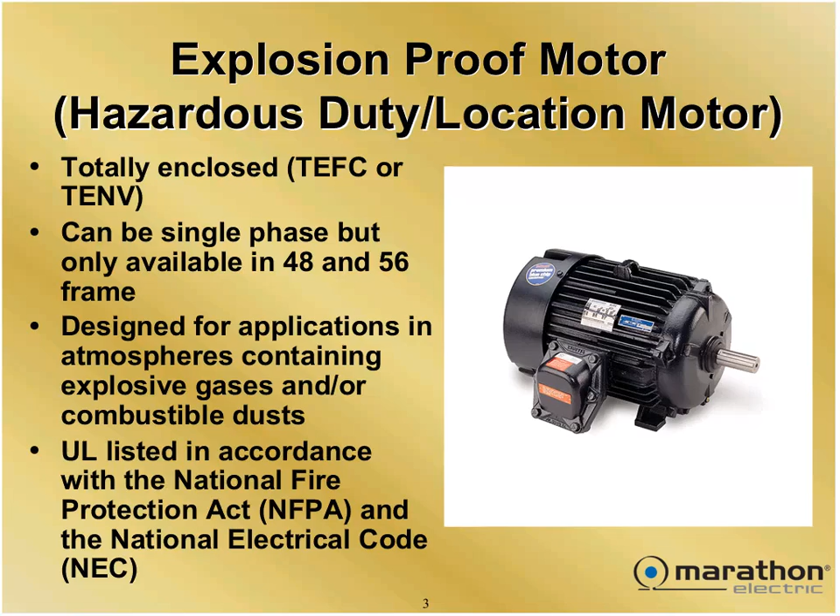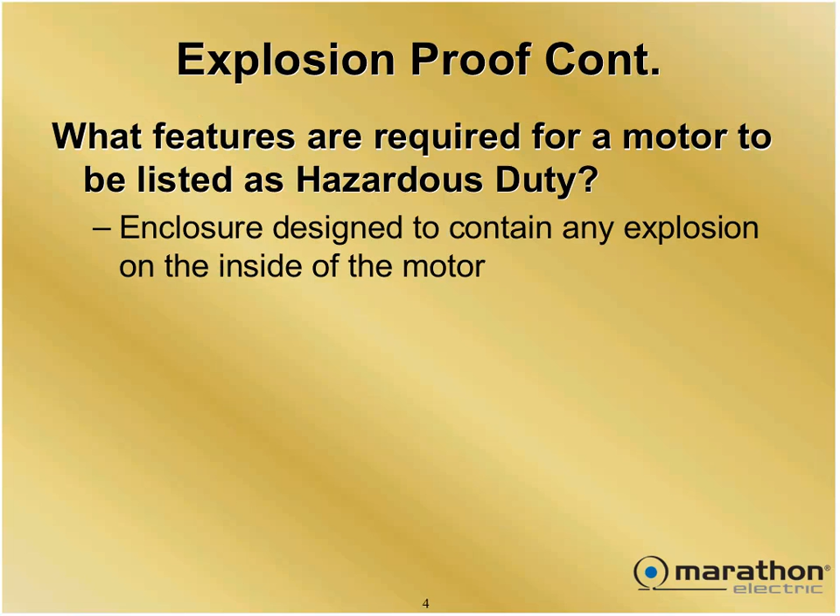They're designed for applications in atmospheres that contain hazardous material, explosive gases, combustible dusts, and some other things you'll see in a minute. They're UL listed in accordance with the National Fire Protection Association and the National Electrical Code. Very, very stringent manufacturing techniques are used to build these explosion-proof motors. You just can't slap something together. Very precise machining. The enclosure is designed to be so tight, it's not airtight, but if an explosion were to occur inside the motor, it has to be contained inside the motor. You don't want it blowing up the building. Okay, so what happens in Vegas stays in Vegas in an explosion-proof motor.

All external devices, all rotating devices, have to be designed so they could never cause a spark, because that spark may ignite the atmosphere. The other part of the requirement is that the motor is designed so that the external skin temperature, the outside of the motor, in any condition, has to be lower than the temperature code that you have it listed for. The temperature code is that temperature in which the hazardous material becomes unstable. So, even though it doesn't cause a spark, you can have enough heat just from the case of the motor to ignite the stuff, and that's bad.

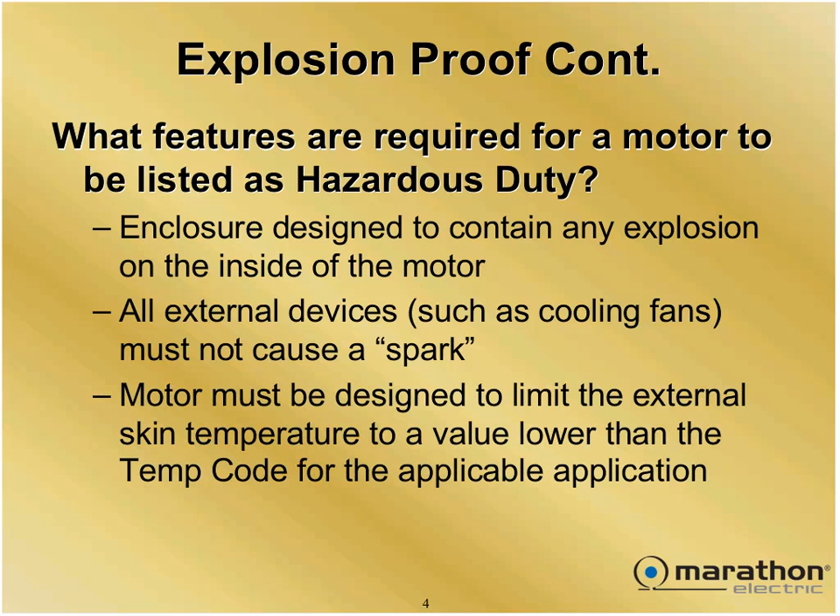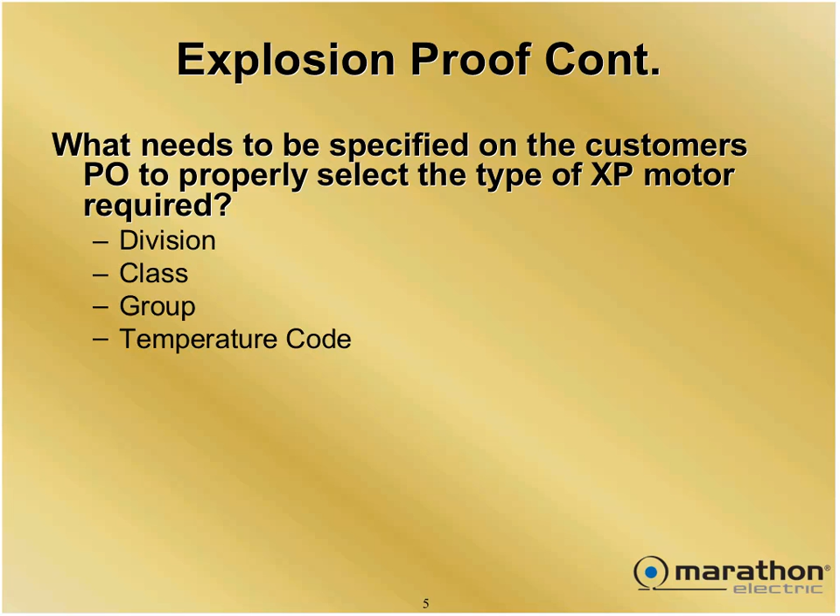So, what needs to be specified on a customer's purchase order to properly select the type of explosion-proof motor for the requirement? We make a lot of different types, and there are four important things you have to have to specify the right motor. One is the division. Second is the class. Thirdly, the group. And finally, the temperature code. If a customer is specifying an explosion-proof or a mod to an explosion-proof, and they don't give you those four items, don't guess. Go back and ask. Those are the four things you need.

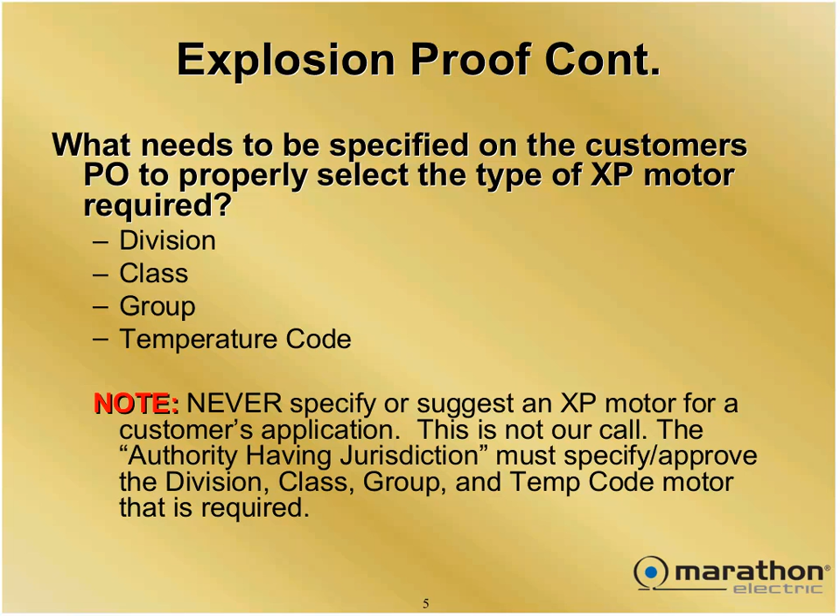Why? Because the authority having jurisdiction over the application is the person responsible to commission the motor for use. If you send them the wrong motor and the authority will not commission it, now you've wasted everybody's time plus money. If it's a build-up, you've got to rebuild it, bring it back, whatever. You might have just built a pile of junk because nobody wants it. But with those four things defined, we have 99% chance that it'll work. So what do these four things mean?

There are really two divisions, just two. Division 1 is a location where the hazardous material is present in the environment all the time during operating conditions. Division 1 is truly an explosion-proof motor. Division 1 always, which should be in bold letters, requires an explosion-proof construction.

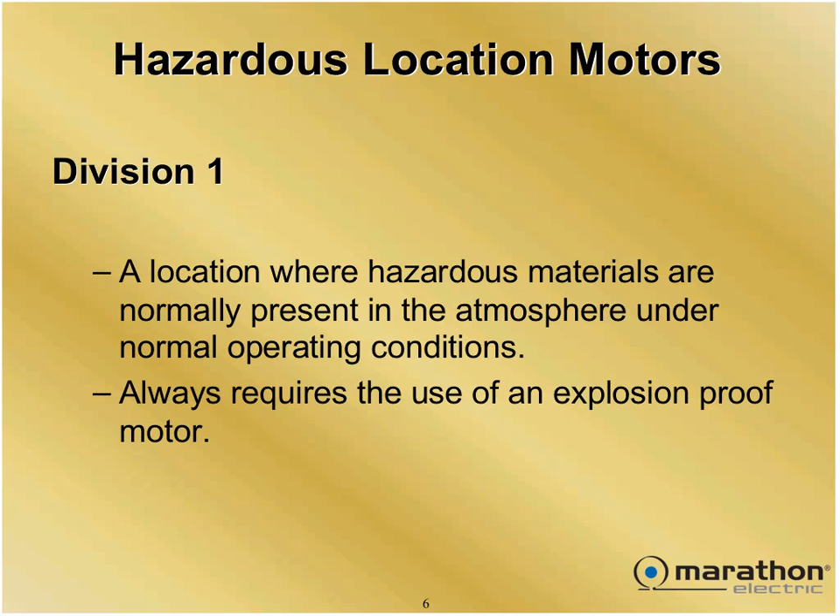Then there's such a thing as a Division 2. A Division 2 is a location where the volatile atmosphere may become hazardous as a result of an abnormal condition. That would be a situation where the motor may be in an office building, but the office building is in a grain refinery, or in a gasoline refinery. And if there were a leak or some catastrophic problem happened, it might get that volatile to this motor. So normally it wouldn't happen. So that's called Division 2.

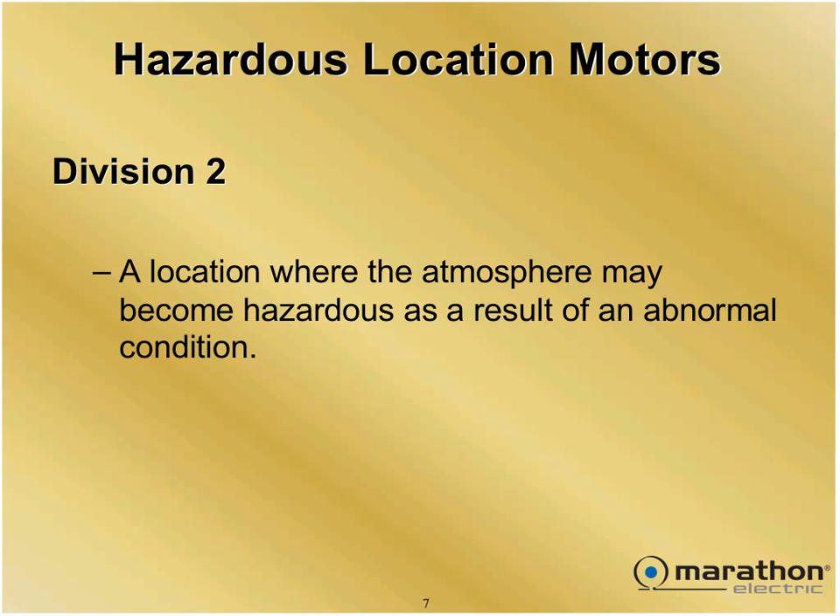Not quite as stringent. You do not always need an explosion-proof motor for Division 2. But, because the NEC allows that, still, the authority having jurisdiction makes that call. We don't make that call. The customer can make the call through his safety engineers, but we don't make the call. So, if they say it's a Division 2, you say, oh, well, that could be anything. I can give them any kind of motor.

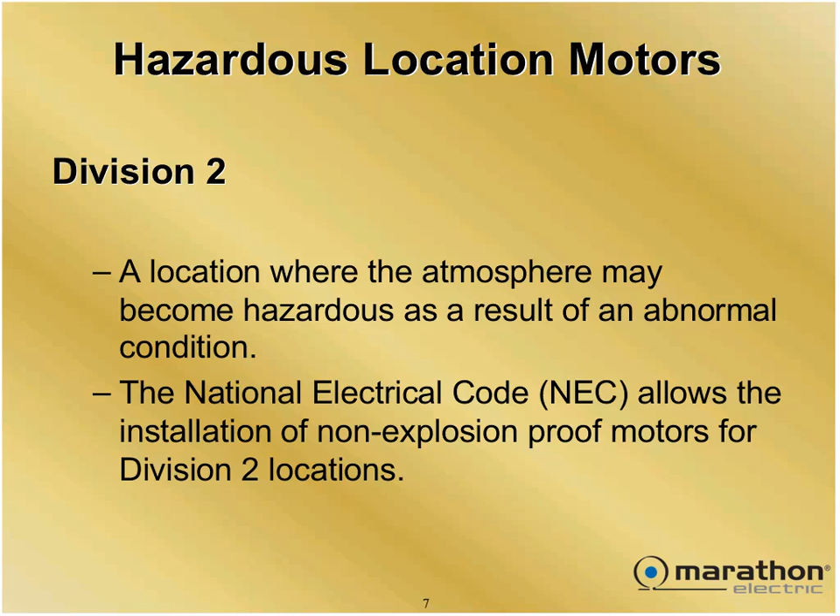No, you can't. Even though it's Division 2, and it's not truly explosion-proof, you still have to build it so anything like a metal fan or anything that spins cannot produce a spark. Safety reason. If we use a plastic fan, which we often do, the plastic fan and the guard that covers the fan must be non-static material. Explosion-proof fans and fan guards are non-static. So if you just had a plain TEFC motor, you could put the explosion-proof parts on it and it would qualify.

Non-static means the parts, when they're molded, have carbon black in them. Carbon black is conductive. It's a conductive material. So that the fan, as it turns, would not build up any static electricity. Because it's conductive, all the static electricity would be bled off to ground. So think about your house in the wintertime when it gets really dry and you scoot across the floor to flip a light switch and there's static electricity, what happens? You get a spark. You can't have sparks. Sparks make boom. You don't want boom. Can't have sparks. So, non-static.

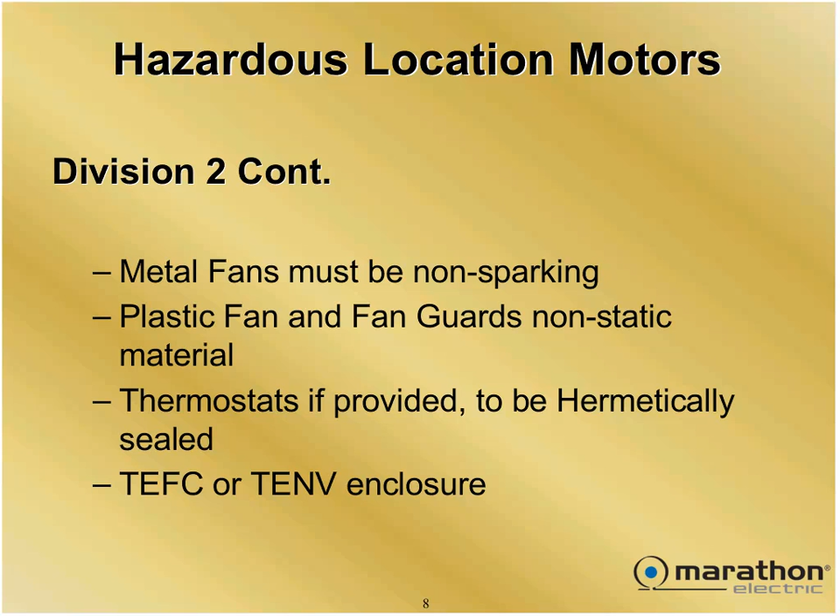Thermostats: if the temperature code requires thermostats, and we have a Division 2, we can use thermostats, but we have to use hermetically sealed thermostats. It's a special type that's made. Reason? If the thermostat were to trip, it sparks. So, hermetically sealed thermostats, the case of them will not allow the spark to get out. That's why it's called hermetically sealed. So we can use those, but they still are normally fan-cooled or non-vent enclosures. Too difficult to make a drip-proof into a Division 2, most of the time.

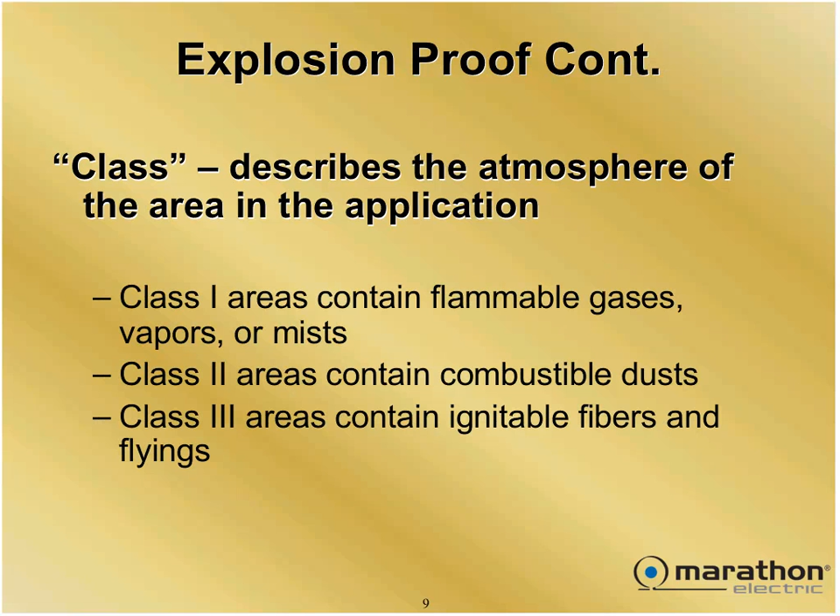Okay, so that's division. Now we have class. Class describes the atmosphere in the area of the application. A Class 1 explosion-proof motor is one that's built for flammable gases, vapors, or mists. Class 2 are areas that contain combustible dusts. And Class 3 are areas that contain ignitable fibers, such as magnesium fibers or materials from textile industries. And guess what? We do not manufacture Class 3 motors. So if you ever get a request for a Class 3, no quote. We do not make Class 3.

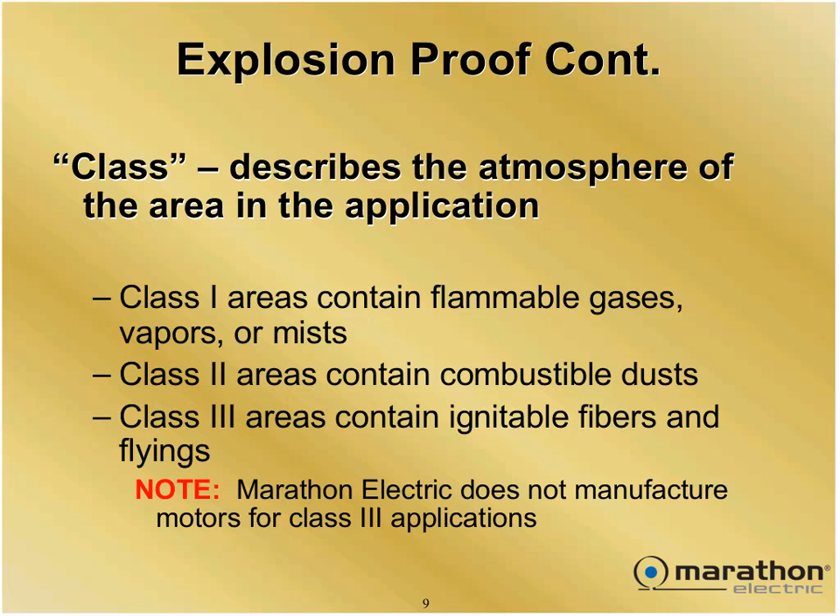Now you would think, well, Class 1 is harder than Class 2 because Class 1 would be gasoline fumes, and Class 2 would just be dust. Well, it so happens that grain dust is used to make dynamite, and plastic dust is used to make C4 explosives. And it is much more volatile than gasoline fumes. So Class 2 is really harder, even though you might think it would be easier.

Then after we have division and class, we have to have a group. Group is the type of gas or dust in the application. And those are usually letters. Group A, B, C, D, E, F, whatever. Note, Marathon Electric does not manufacture motors for Group A or B. B is hydrogen, highly explosive. If you have a request for a B, I think we manufactured one motor in my whole career that qualifies for B. So, you will look in the catalog, you will not find motors for Group A and B. And only 48 and 56 frame, for the majority, are acceptable for Group E, which is metal dusts. Typically then, the ones we have are C and D, and F and G. So we skip the others.

And finally, the temperature code. The temperature code describes the maximum allowable skin temperature that the motor can get to that we talked about just previously. Those codes start with T and have letters and numbers, and all of those have a different maximum temperature value. In an explosion-proof environment, in order to meet the temperature code, the motor must go offline prior to reaching the temperature that you coded it for.

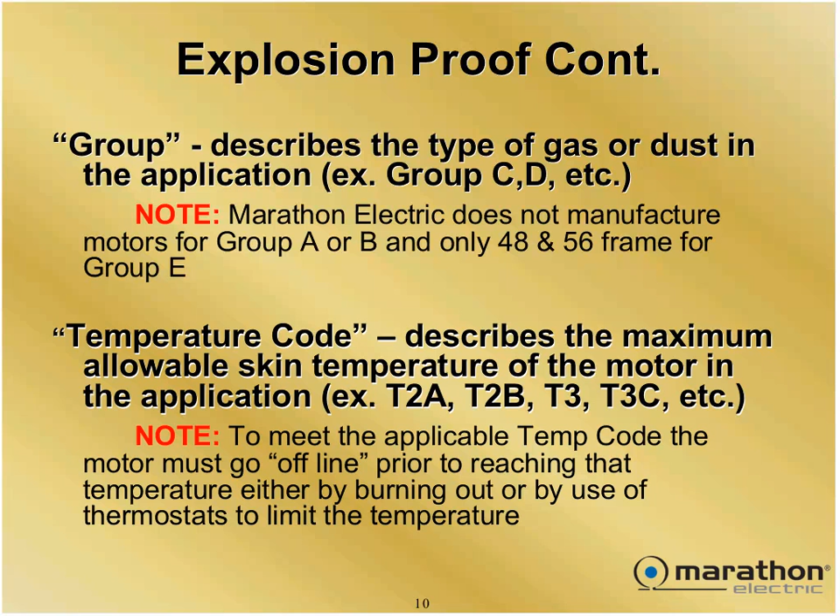That either means it has to burn up and still not get hot enough, or we have to have thermostats, the thermal protection in the motor, to limit its temperature if it does start to get hot. Okay? That's explosion proof. Four things to remember: division, class, group, temperature code.

Another type of definite purpose motor we make and sell a lot of are called fire pumps. This is the only other UL listed motor we have that I know of. Most motors are UL recognized. These two motors we talked about are UL listed because of the National Fire Protection Association and the NEC.

The fire pump motors are standard. The standard fire pump motor is drip-proof, rigid base. They're 3-phase. They're used for fire pump duty. I've never seen a single-phase fire pump ever. And they're basically used for the sprinkler system you see in this room. So the sprinkler system goes on, and hopefully it'll douse the fire before the building burns up.

Typically, they're painted fire engine red. Not all of them, but the majority of fire pump motors are painted red. So when the fire marshal comes in to inspect your building, he sees that red motor. It's not just a regular pump motor, it's a fire pump motor. That's what he's looking for.

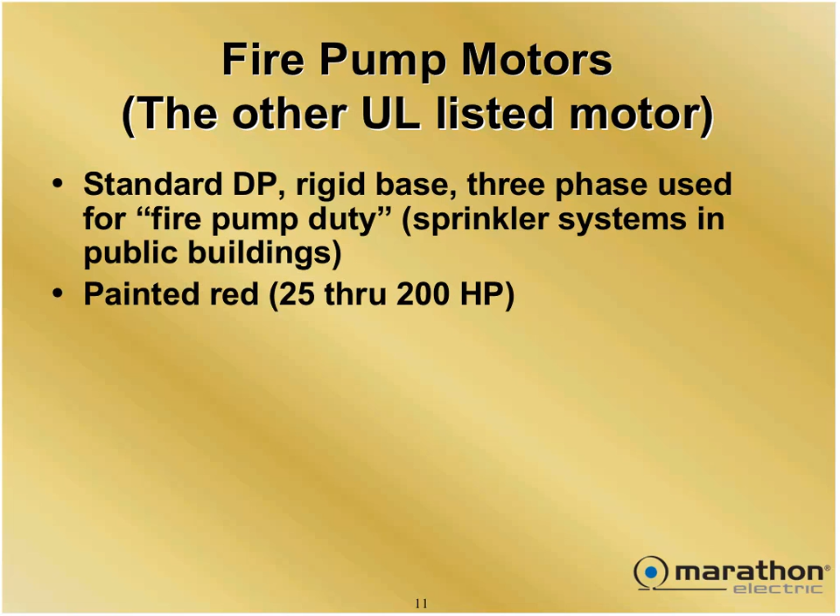They are soft starts, code G or less, plain vanilla torques. They have 12 leads, typically, suitable for part winding start and for wye delta starting. The reason for that is they assume that if we have a catastrophe like a fire, we may have some very bad power shortage in the building. So we don't want to hard start this motor and have it trip its breaker, and we don't get water, and we got a burned up building. So they usually make them for soft start, and they're easy starting pumps. But they do have 12 leads. So they are UL listed.

They are exempt from the premium efficiency levels of EISA. So they're EPAct efficient. The reason for that is they are so seldom used. They're only used when the fire marshal checks the system or if you have a fire. When the fire marshal comes to check the system, the motor only runs 5 or 10 minutes to make sure that it's working. And they usually only come to a building once a year or every 6 months.

And the second reason: when they are being used, you have a fire. The last thing you're going to worry about is whether you got a premium efficiency motor or not when your building's burning down. So they allow them to be EPAct. They don't use a lot of energy unless they're needed.

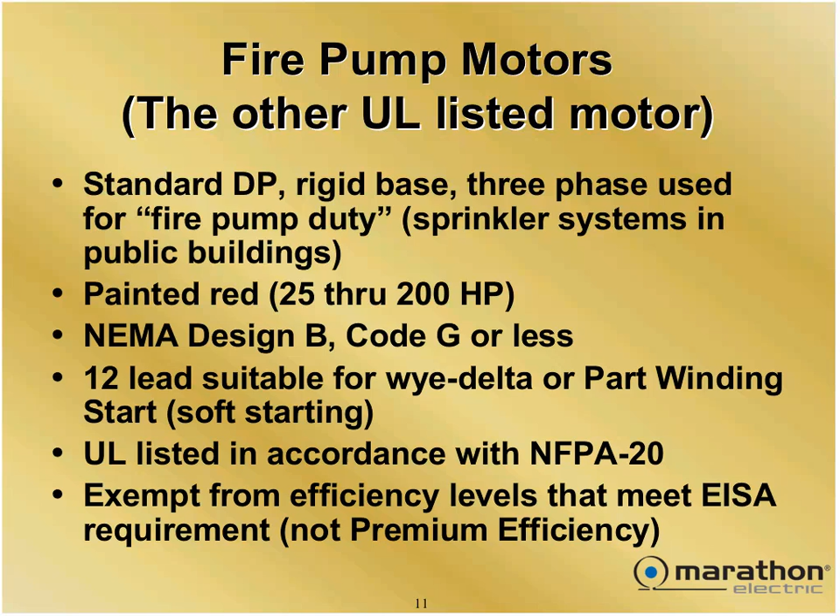Another group of definite purpose motors we sell a lot of, and Marathon is one of the largest servicers of this industry in the world. They're called farm duty or agriculture motors. The four most popular types are what we call high torque, extra high torque, whose nickname is chore motor, because it does chores on the farm, I suppose. That's why it's called that. An auger drive motor and a crop dryer motor. We'll talk about each one of these.

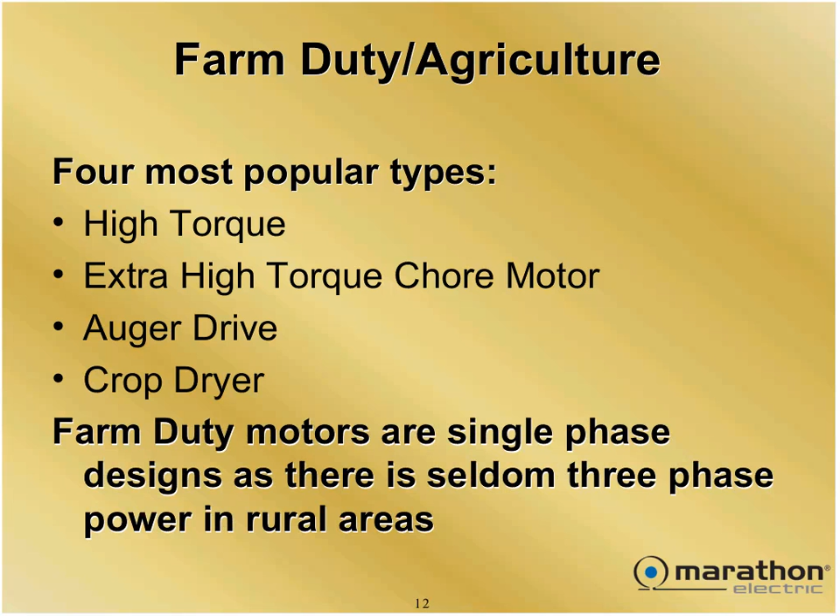Farm duty motors are primarily single phase. Why? Farms don't have three phase. Farms have single phase power. If we had to put three phase power on every farm in this country, we'd go broke. It's very expensive. So they're single phase. They're used in rural areas. Some are three phase, very, very few. The high torque and extra high torque have similar features. They are fan cooled so they have better reliability to be used outdoors.

More reliability than a drip proof. Even though if they're not used outdoors, it's okay, but we make them fan cooled. So we expect them to be in some kind of an outdoor or dusty or dirty environment on a farm. And the fan cooled also makes them better for rodent protection.

Because if you're on a farm, you're going to have mice and snakes and things that, when it's cool out, like to crawl into your nice warm motor. Well, if it's drip proof, they'll get in. If it's fan cooled, odds are they won't get in. So they're rodent protected. The high torque motors are capacitor start or capacitor run motors that are general purpose torques.

That's a high torque motor from our previous discussion about various single phase types. But the chore motors have extra high torque, 300% plus. And they're used for tough applications such as silo unloaders and barn cleaners and bunk feeders.

Now on a farm, especially in this part of the world, if it's 10 below zero and the farmer wants to start up his elevator to put some hay in the barn or something, the gearboxes are all cold, the grease is real thick, it might have ice on it. You need this big high starting torque motor to break things loose. So that's why they're like that. That's why they're called chore motors.

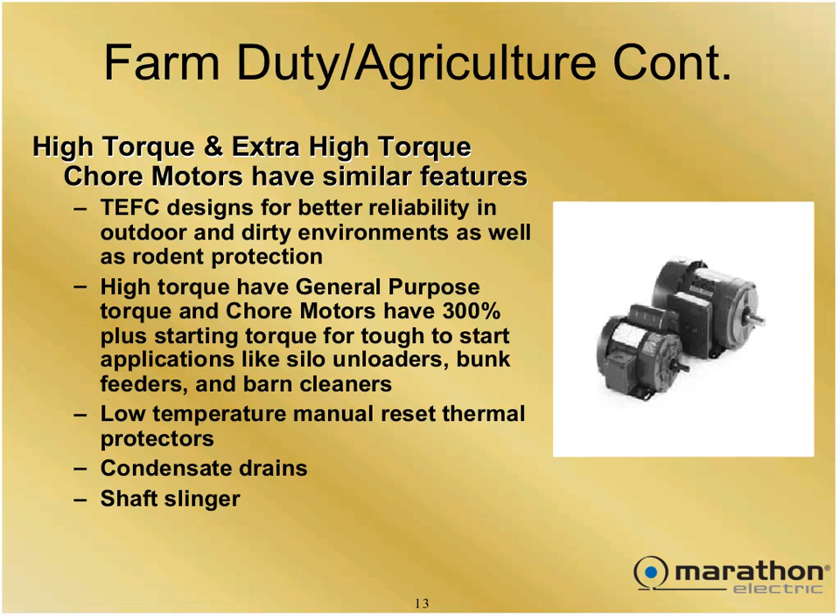So we put condensate drain holes in these things, real small holes to let the condensate have a chance to drip out. We put a shaft slinger over the shaft so that dust doesn't get towards our bearing, and that's what those motors look like. Another very common definite purpose motor on a farm is called an auger drive.

Auger drives are single phase, of course, because we're on a farm. They're used primarily for automatic feeding of animals, but there are hundreds of other uses for them. Sometimes they're used for automatic product recovery systems, such as collection of seeds or eggs from a chicken delivered to a central place where they can be washed and processed and packaged without a human being having to go gather them all.

The automatic feeder is pretty obvious. You have 30 animals in a row in a barn, and you have to go feed them all, so you dump all the feed into one place, turn on the auger, and it delivers it down to the animals. That's what they call it. There are some issues with this motor, by the way, that we have to take care of.

We always have issues. They are almost always NEMA N flange mounts, because that's the way the auger gearbox connection is made, so that they will fit. So they're NEMA N flange mounts. They have automatic or manual overload protectors also. You certainly don't want somebody getting their hands in an auger.

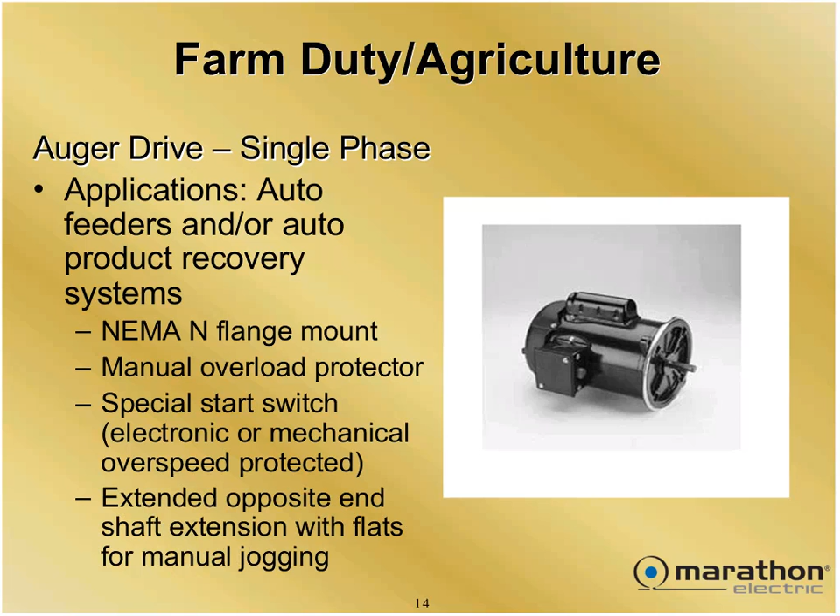Another type of farm duty motor is a crop dryer motor. These are special designs also. They are almost always drip proof, and they are used in grain drying systems. You've probably seen them on the farm. You may have a big bin of grain, and at the bottom there is this wind tunnel with a motor mounted in it and a huge fan. And this motor is going to drive this fan and draw air through the grain to dry it out. It could be tobacco, could be corn, could be any kind of things.

And they're primarily single phase, but sometimes these are three phase and we stock them both. The reason these are more prevalently three phase than the others is a lot of these grain drying systems are by a grain mill or a refinery, and they may have three phase power. On the farm you probably don't, but at the grain mill you might. So we stock them both.

They're ODP air over designs. In other words, the fan that the customer has that's drawing this air through the tunnel draws air over the motor for cooling. The motor is located inside this wind tunnel. It's just like an open-ended barrel on both ends. Okay? They have long leads. Because they're mounted inside, we provide long leads to get the leads to the outside so the farmer can connect it outside and doesn't have to crawl inside to connect it.

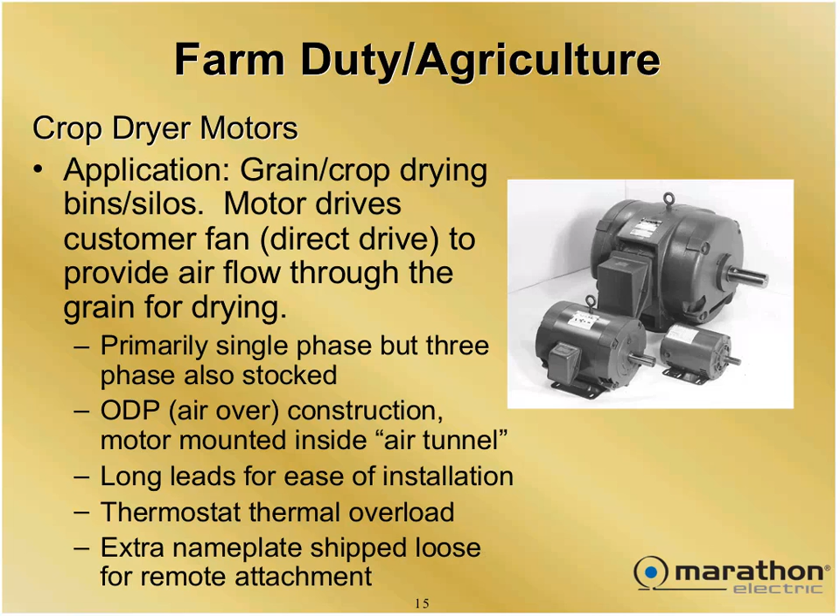Another type of specialty motor that's fairly new for us are washdown motors, specifically designed to actually physically hose off the motor with water or caustic soap, even steam sometimes. They're used in food processing where there's cleanliness issues, so you have to wash stuff down. So we have washdown motors now. You've heard me say time and time again, water and electricity don't mix. These motors are specifically designed such that they're sealed up and they're virtually waterproof. I'm not saying you could dunk them in a bucket of water, but you at least can wash them off.

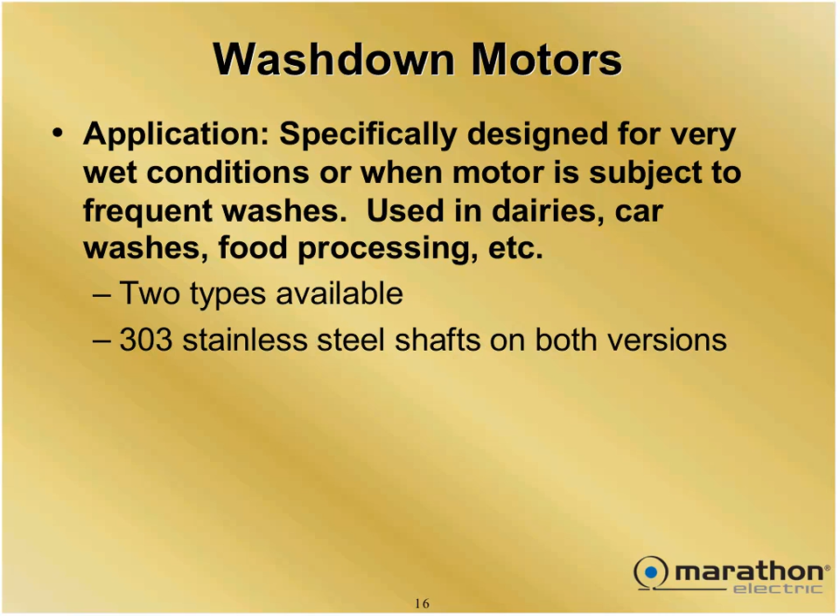We make two different types. Both types have 303 stainless steel shafts. The shaft extension on these motors is stainless steel because the 303 stainless resists rust. It's going to get washed down, and you don't want it to get rusty.

They have corrosion-resistant coatings on their internal parts as well as the external, such that now these motors are gonna sweat from the condensate. They're gonna get wet inside. They have drain holes, but that doesn't mean that it's all gonna come out. Sometimes they get clogged. So we have to put corrosion protection material all on the inside of these motors. We also use gaskets and seals on the external part for the very same reason.

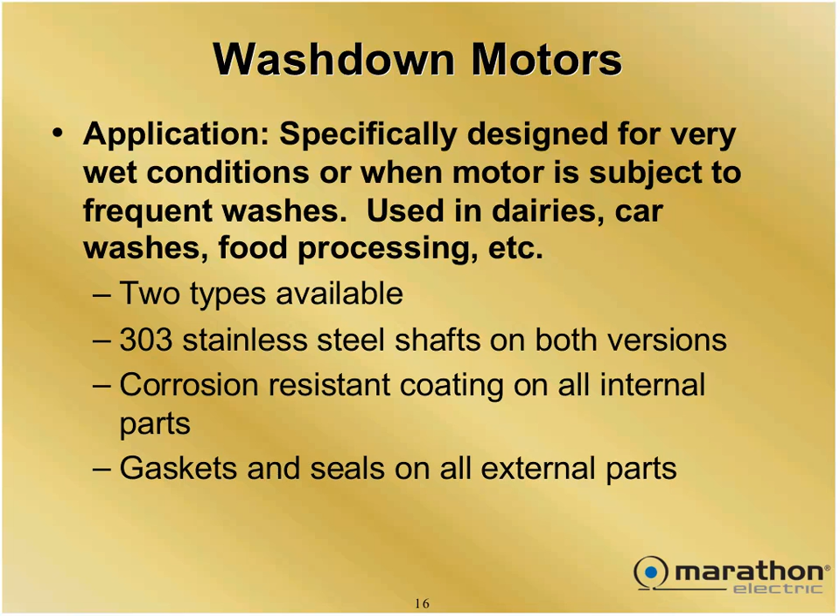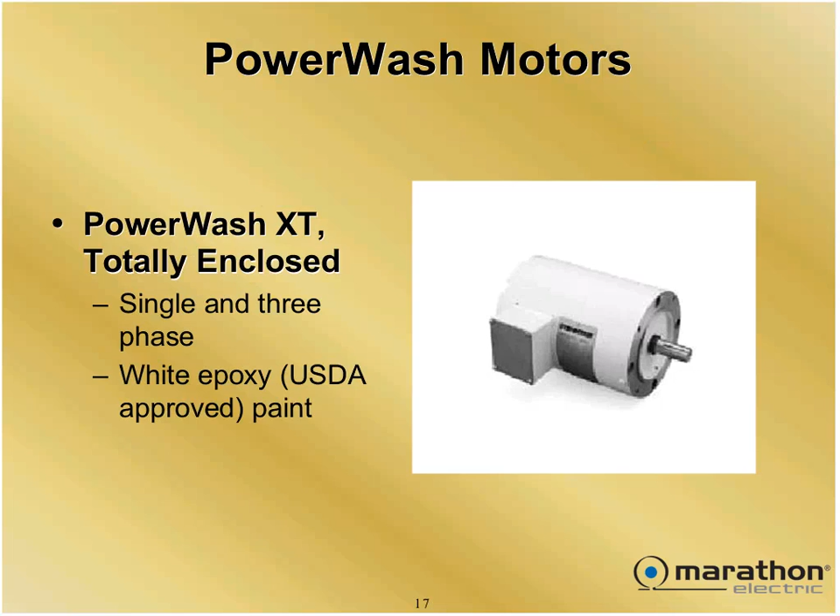Keep the water out. The conduit box has seals on it, and the shaft does not have just a slinger, because water can get behind the slinger. It actually has a seal. One type is called PowerWash XT. Totally enclosed. We build them both single and 3-phase. They have white epoxy paint, which is USDA approved, on the outside of them, and all the corrosion protection on the inside. They are not used for the super demanding applications of washdown.

This one is Power Wash SXT, which is totally enclosed. These are primarily only 3-phase, but they are inverter duty rated since they're 3-phase. And they have all stainless steel construction. So they're a brute. I mean, you can wash these things down with lye, caustic materials, or whatever needs to be used. They're often used when we have an application where they're processing meat, cutting chickens apart, or whatever,

where there's serious E. coli issues, germs. We have to make sure we have cleanliness. They use this type of motor quite a bit. The other type of motor might be used in something like a bakery or maybe a brewery where it's grain, but you don't have as much issues with contamination. Is this 303 stainless?

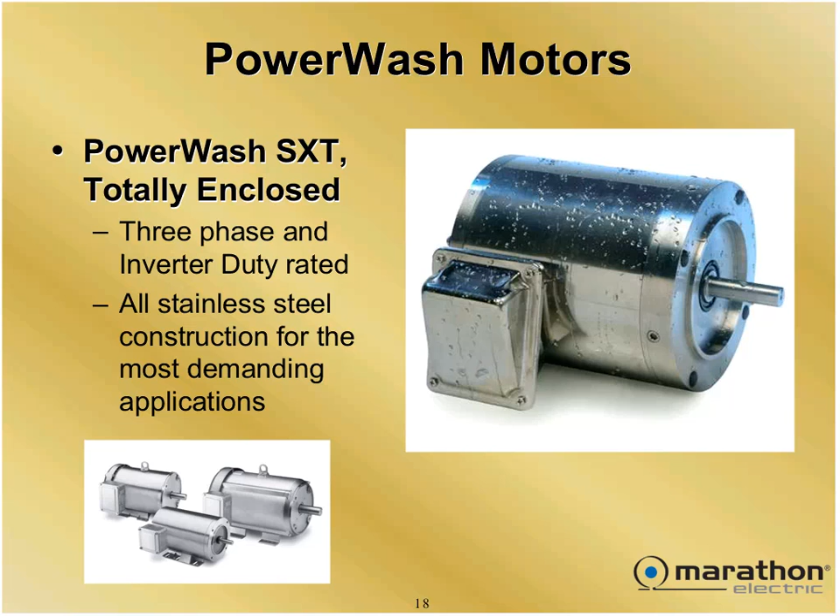303 stainless. It is a 300 series. I'm not positive, it's a good question. 300 series means it has rust preventative, so it may not be exactly 303, but it's a 300 series, could be 316, 320, not sure. It's a good question. Okay, back to our questions again.

Okay, who's my victim today? Kristen's my victim. Okay, Kristen. Motor designed to successfully operate in a hazardous duty location is called what? What kind of motor? Explosion proof. Good job. Anytime you see explosion proof, you think hazardous. They're used almost interchangeably, those two words. Explosion proof and hazardous. Pick a victim.

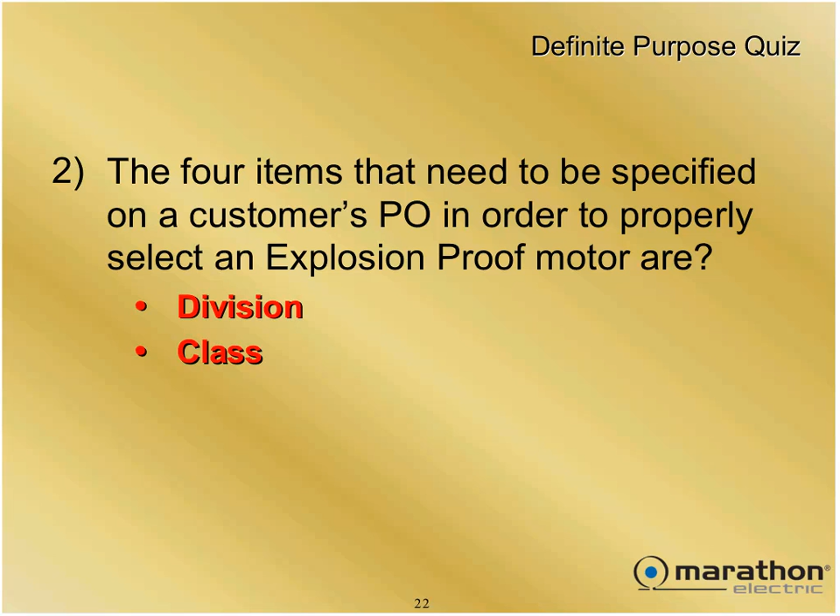Danielle. Oh, you got a hard one. Four items needed to be specified on a customer's PO in order to properly select an explosion proof motor. If you don't know all four, give me some. Division, class, group, temperature. Outstanding. Nicely done. All right. Pick a victim. All right. Your turn.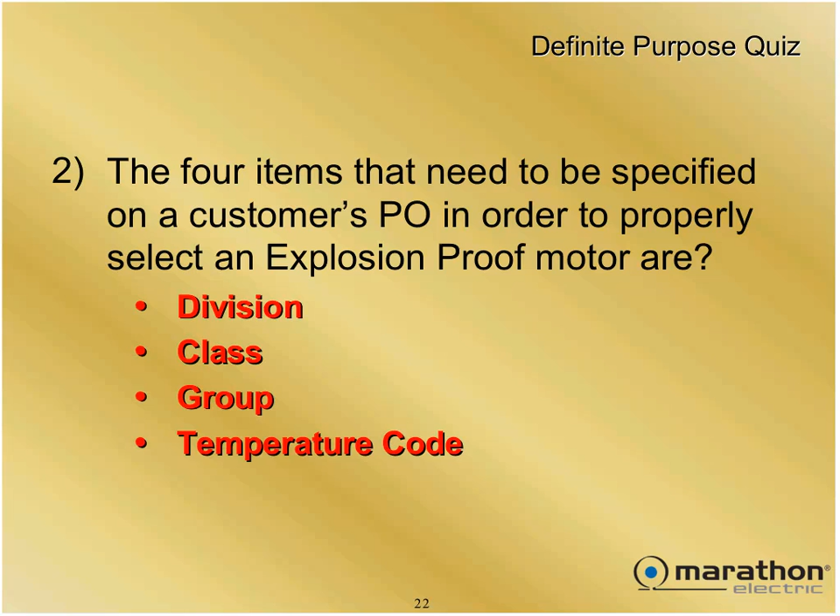The definite purpose motors used for fire pump applications are typically painted what color? Fire engine red. Absolutely. Okay. An auger drive has an end flange mounting. Auger drives have end flange mountings. Yes, they certainly do. Very nice. Now we're back to Kristen.

Which farm duty motor, extra high torque, 300% plus starting torque? What's its little nickname? Chore motor. Chore, you're totally right. That's absolutely right. Now we're at Danielle. What explosion-proof class of motor does Marathon Electric not manufacture? C as in Charlie, you say? Class 3, ignitable fibers. Very good. You do not make those. And now, we're back over here.

Power Wash XT motors are painted special white to prevent rusting. It's a rust-preventative paint. What other property of this paint makes it USDA approved for food processing? It's non-toxic. It is non-toxic. That means if the paint were to flake off, you would not contaminate any food. That's what it's for. All right. Where are we? We're back to Kristen. We went through the gamut. Oh, she did one.

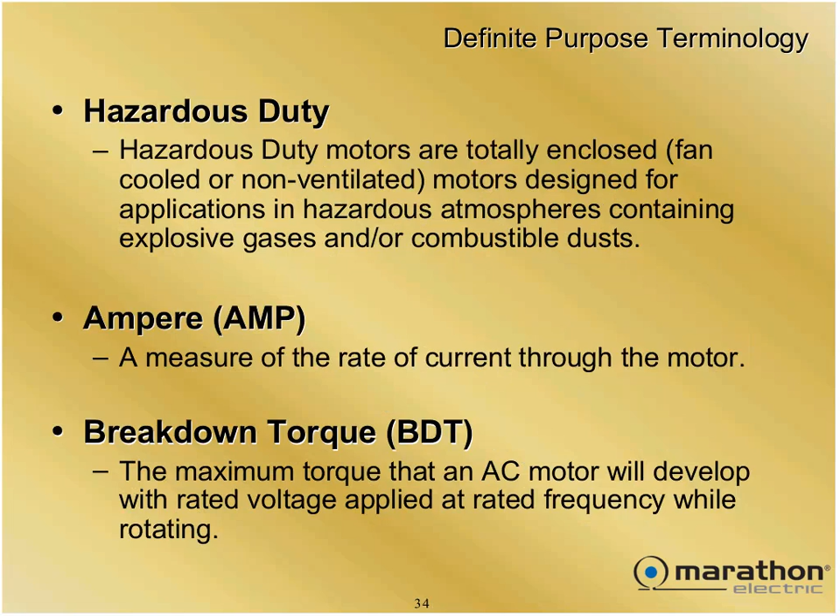Ready? For reasons of safety for the end user, most farm duty motors are equipped with manual reset thermal overloads. What type use automatic reset thermostats? Crop dryer. Crop dryer motors. What an intelligent group. Very good. There's a glossary of terms attached to this, like always, that explains some of the things I've been talking about. And that's the end of the presentation.